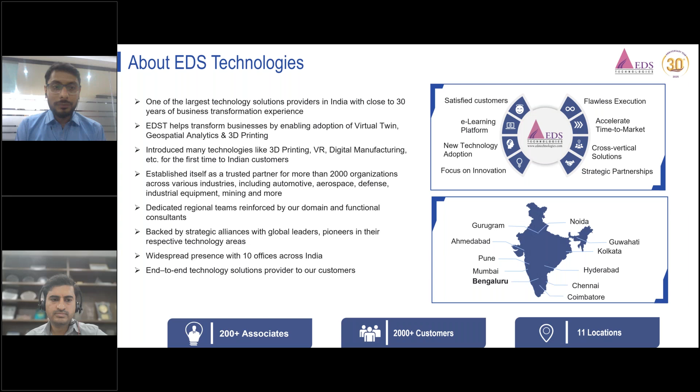We are backed by strategic alliances with global leaders like Dassault Systèmes, with whom we are a strategic business partner, and other leaders as well who are pioneers in their respective technology areas. We have a widespread presence with our offices across 11 locations in India. We consider ourselves to be an end-to-end technology solutions provider to our customers.

So today we have two speakers for our session today. The first speaker is Mr. Srikumar Maganti. He is the Senior General Manager Technical at EDS Technologies. He carries a rich experience of more than 23 years working in aerospace, automotive, energy, and the IE segments, involving design, simulation, digital manufacturing, and PLM applications. He has engaged and led multiple teams in technology pre-sales, technical support, corporate trainings, and customer relationship management. He has also worked on-site for various numerous prestigious clients to provide the best customer experience. At EDS Technologies, he handles the 3D Experience brand and also holds various global certifications from Dassault Systèmes.

Our second speaker for the day is Vinayak Chaudhary. Vinayak is currently serving as a Senior Application Engineer at EDS Technologies. He carries an overall of 11 years of experience in aerospace and industrial equipment segments, involving NC machine programming and validation and valves manufacturing. He also carries on-site global project delivery experience with commendable appreciations and best customer satisfaction. Currently, he is involved in digital manufacturing, technology sales, technical support, and corporate trainings.

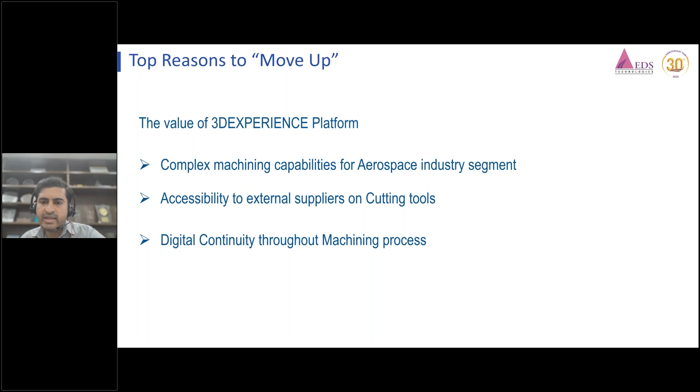Then the digital continuity through the machining process - how this platform will help maintain digital continuity into the machining process, we're going to understand that. And the last one, available on the cloud - this platform will be managed in the cloud, so how this cloud will help in the future, we'll look into that.

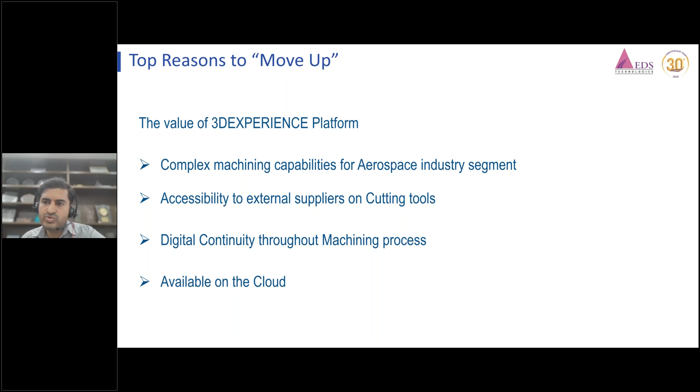So we'll understand here the 3D Experience platform, how it changes the way we do business. As I mentioned earlier, we will move from a file-based environment - CATIA is one of the file-based environments - to the 3D Experience platform. So how we can move and what benefit we can get from it.

The 3D Experience platform enables the capability to work anywhere, and opens the door to collaborating among multiple people in different locations. Even if it's just three people in the same town, now they can work in their own homes and offices. There's no need to come into the office, and they can work in different places too.

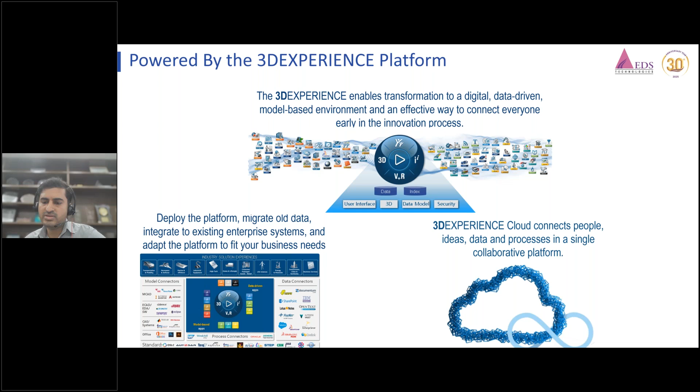You can utilize your existing V5 data and the post processor in the newer environment. The 3D Experience platform can be implemented using servers in your own company or on the cloud. We'll cover the advantages of using this platform a little later in this session.

So here in this video, we'll just see what the 3D Experience Delmia machining capabilities has - just briefly, we'll see a brief video here. Later, in the next slides, we'll go step by step through what capabilities we have there.

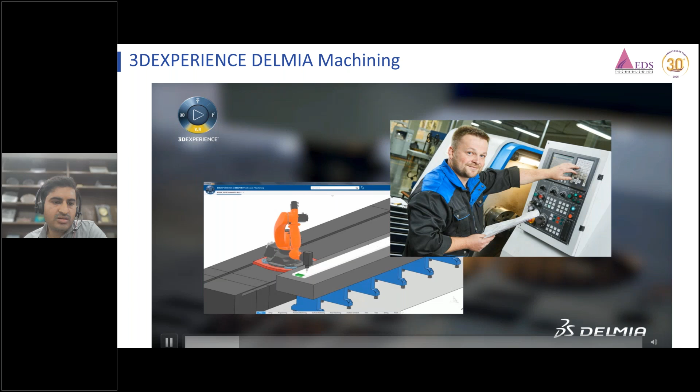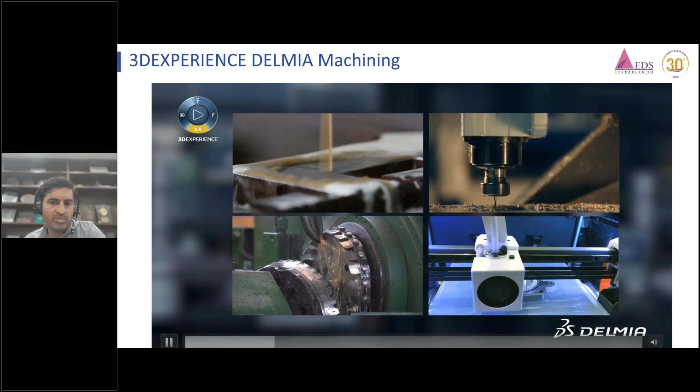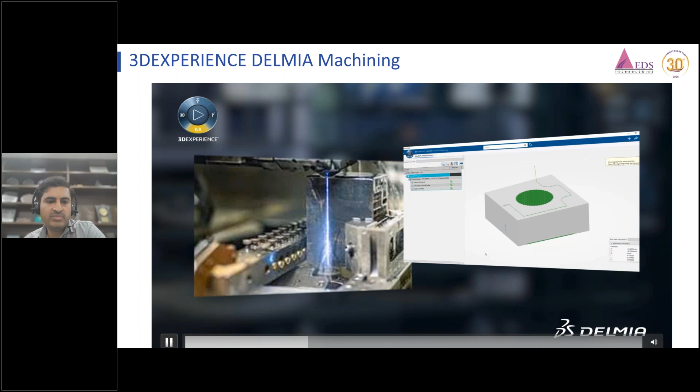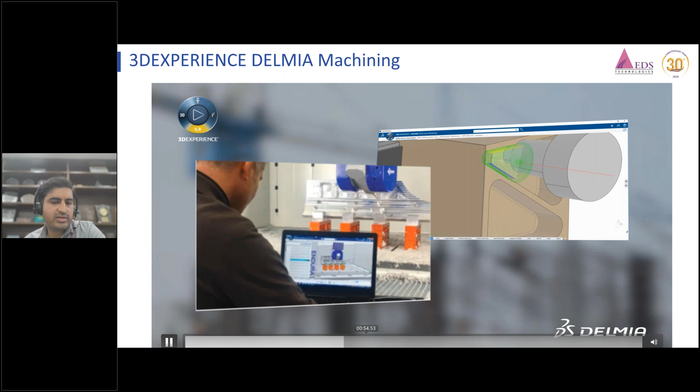And some new features have been added into this 3D Experience platform. In the coming slides, we're going to understand those applications in detail.

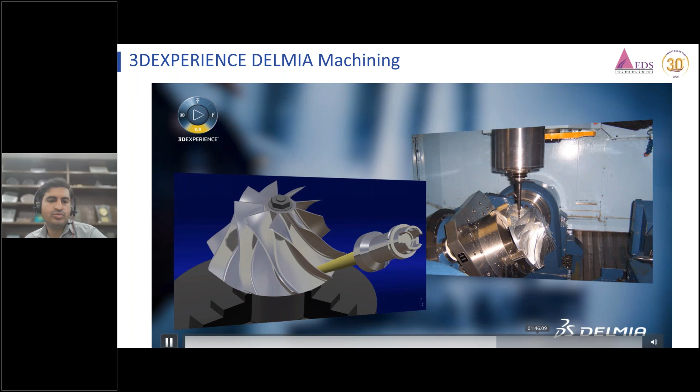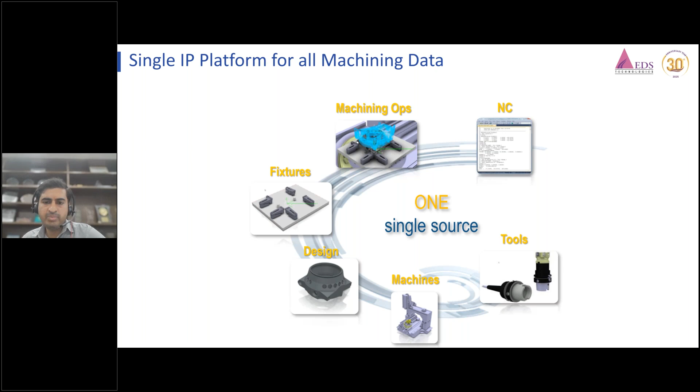So here in this platform, we can reuse all CAD machining processes, NC programs, machines, and accessory tools from one single source. Semantic search capabilities allow every NC-related object to be found quicker and easier. Version control can also be managed in this platform, along with design tooling and fixturing in the same collaborative environment. All those things can be managed in a single source platform.

So let us understand the cutting tool management in the 3DS platform, and how it will help the aerospace industries and other industries as well.

For example, there will be confusion for a new programmer creating a tool - whatever tool we're going to create, we don't get an idea whether that will be available in the market or not. So here we have an advantage: you can fetch the existing tool directly from the vendor's website. Whatever the vendors have in their websites and in their plant, we can directly pull those tools into our 3D Experience platform, so that data can be utilized internally by all stakeholders like NC programmers, tool rooms, and shop floors.

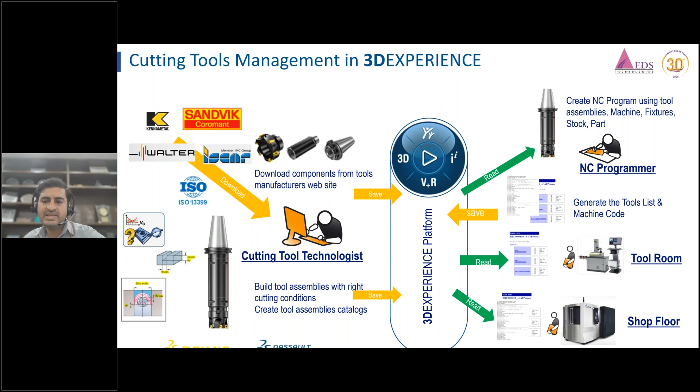All those stakeholders can utilize it from the single source. Let us see in the next slide how we can create that tool.

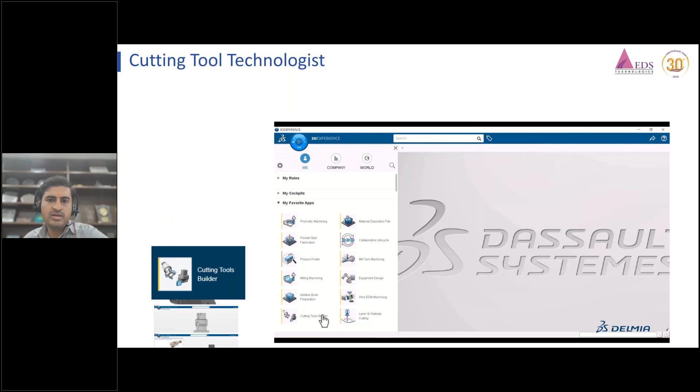So here in the video you can see that we have just added 3 vendors: Kennametal, Iscar, and Sandvik. I'll select one of them, the Iscar vendor website. From their website we have the capability to get the STP file, exactly what it looks like, into the P21 format, which we can directly download from the vendor's website and make into a tool assembly.

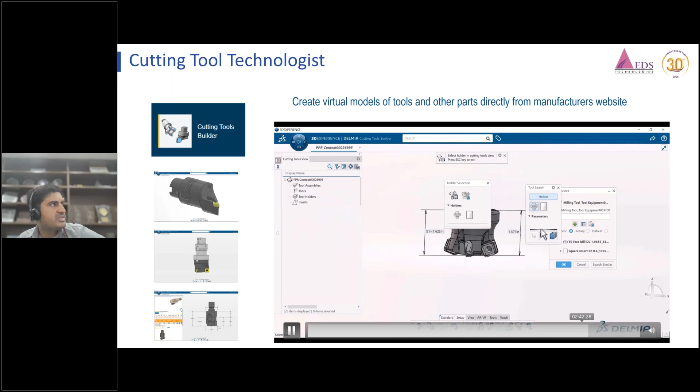Now for this tool, what are the suitable inserts, we are going to add that. You can see we will similarly add the inserts from the same website, and what suitable holders are available, that we can also pull into this platform. Now you can see exactly what dimensions the cutting tool provider has, which we can directly use in our machining platform.

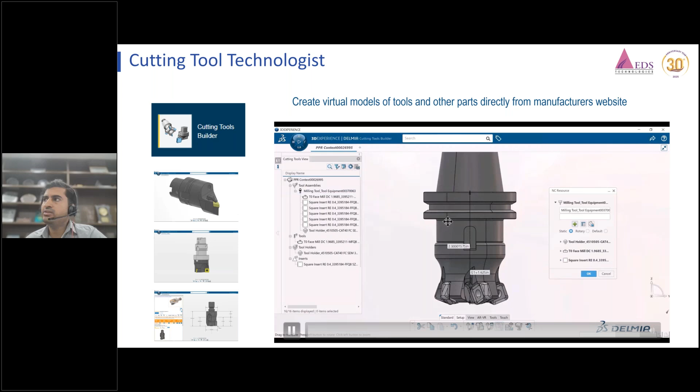So like this we can create n number of tools and make it as a catalog. Then wherever available, we can directly call from the catalog and reuse it. So it will save us ample time to create NC machining programs.

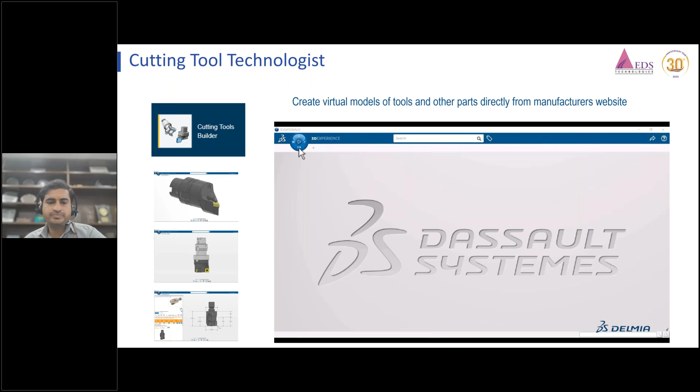So next we understand improved collaboration across departments. How does collaboration help us improve production? An improvement in overall machining program time plays a major role in increasing quality and teamwork. How does that happen? Let's check.

So in this 3D platform, what happens is they can work directly on the CAD data model managed by the CAD team. If the CAD team needs to create a new version, they are free to work with the previous version and update to the newest when they want. So that work can happen at the earliest design step, and they can optimize their program to reduce programming time and ensure quality. This is just one example of how you can break organizational barriers, expand technical knowledge across disciplines, and collaborate.

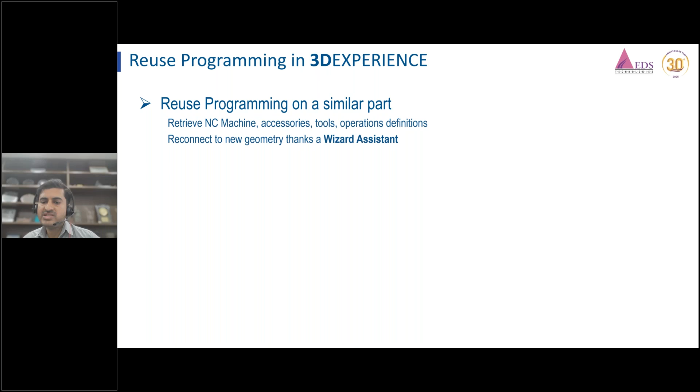Let's look at some examples. Next we'll see reusing the program, and how reusing programs benefits us. You can see here capitalizing on machining knowledge, know-how, and replaying operations on a similar part and features, so we can drastically gain time when left and right parts have to be programmed.

With this option we can save ample time. For example, if for the same kind of part we took 50 minutes, we can reduce that by 50% to 40%. If a slightly modified part comes in, using this option we can reduce that time and save up to 50% to 40% of the programming time.

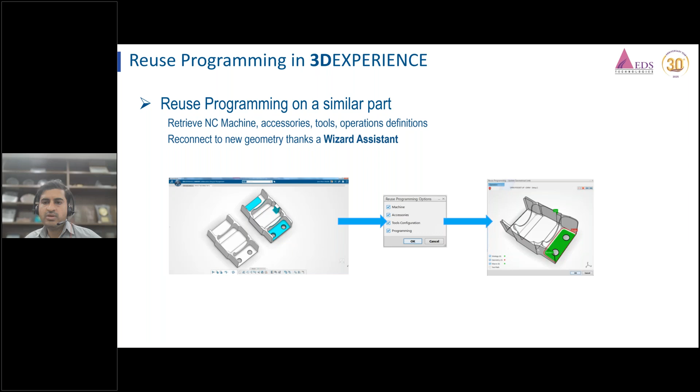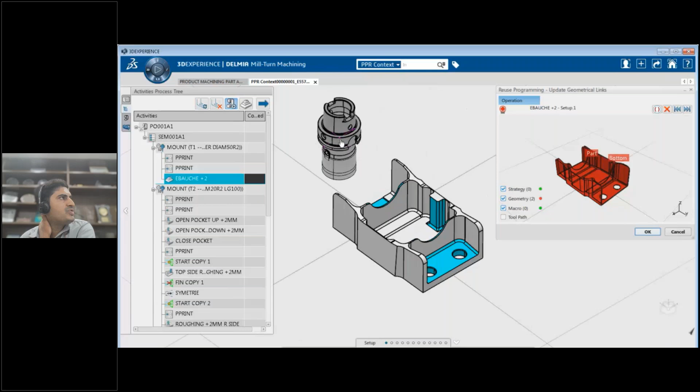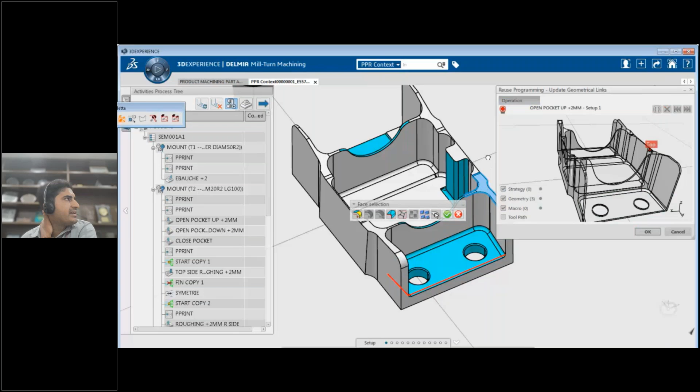So here in one of the videos you can see we have imported a slightly modified part. Since a similar part was used earlier, just by selecting the next option you can see what type of tools we used and what geometrical parameters we selected. Those geometrical parameters can directly be reselected from there to here, just by selecting options like part and bottom, as shown in the video. By selecting that, you create this option and you're ready, having directly reused that particular machining operation just by selecting these options.

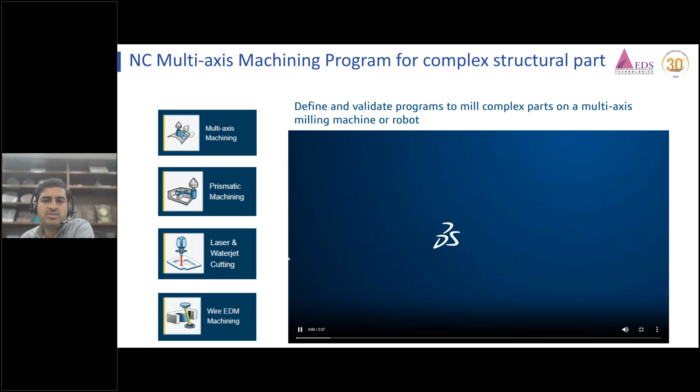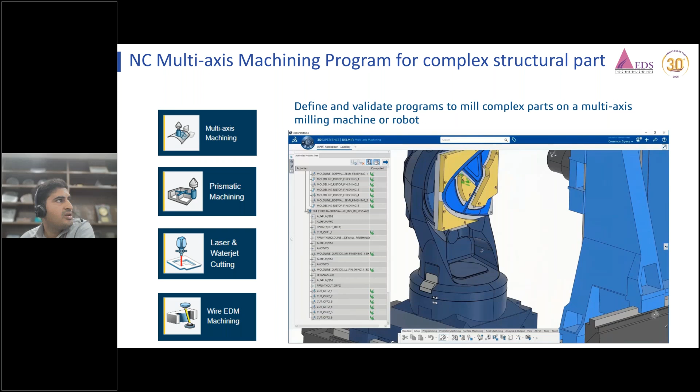Next we'll understand NC multi-axis machining. This is one of the most used techniques in the aerospace industry, also called flank contouring. This helps aerospace industries machine complex parts like structural parts with inclined surfaces and flanges. It helps very smoothly finish these operations and get the exact required surface. We have much more flexibility here, like tilting angles and all, such as tangent fan, fixed angles, and fourth axis machining.

Many of the options we have here based on the operations, we can choose those options and utilize them to improve our machining quality.

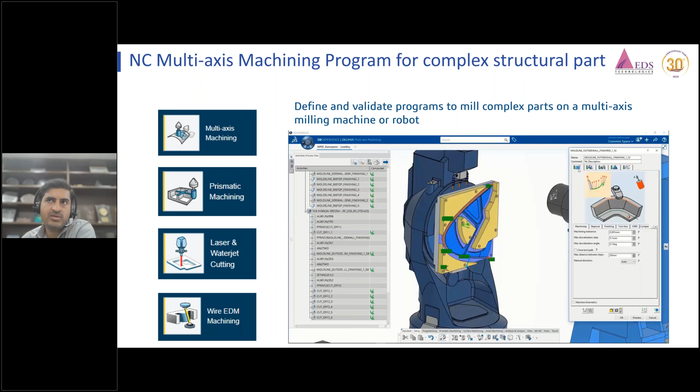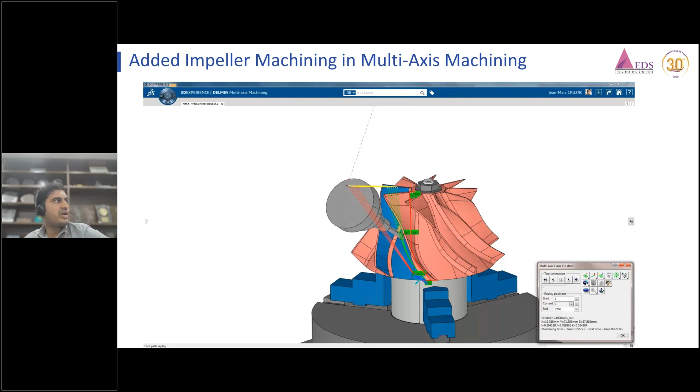Next, there's an option we added into this 3D Experience platform called impeller machining. This is also a multi-axis machining program. With this, we can directly create a machining program.

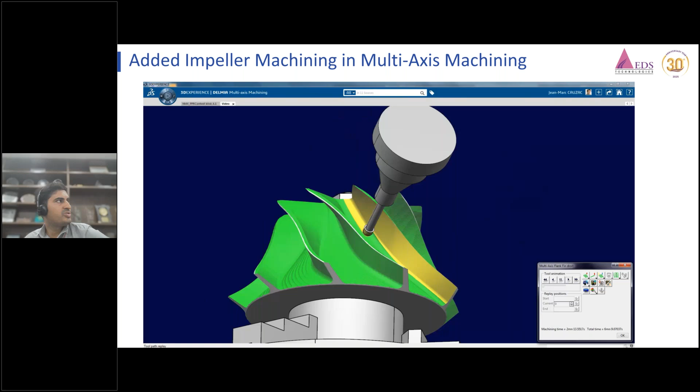We have a separate machining operation called impeller machining. With that only, we have the feasibility to select the different set of flanges and what are the impeller blades. Those we can machine clearly and very easily create the machining program for, and we can validate it into this platform.

Next option is they have added helix motion to the surface machining option. This added feature will help when changing the cutting tool or changing the radial path, there will be a getting a line. In actual machine it's a visible line we can feel. So to avoid that kind of issue, they have added one option called helix 3D.

With this option, continuous smooth motion will be generated. There is no radial tool change in between. So with this operation, we can avoid the unnecessary lines created onto the surface of the machined part.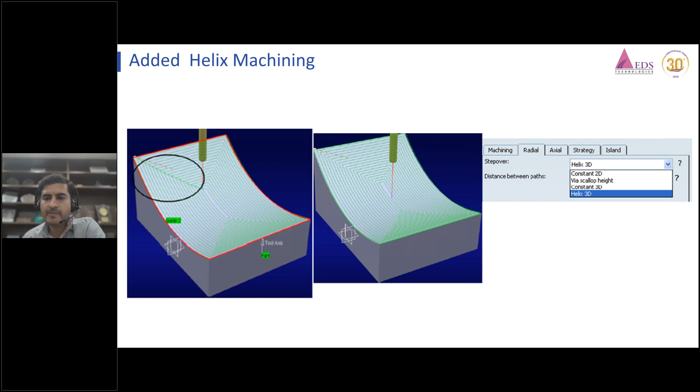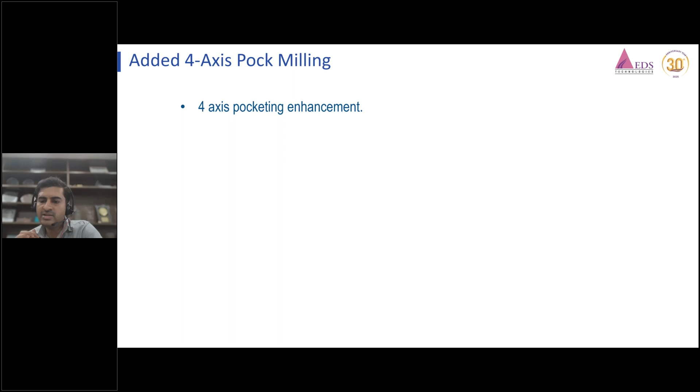We can select that, and it allows the definition of the lead angle of the fourth axis lead angle onto the tool axis. We can perform that here.

And the added stiffener option. In V5 we used to use multiple operations. For example, when I was in the aerospace industry, I would use multiple isoparametric operations to create this stiffener operation, which would take ample time to create those n number of machining operations. So here they have added this stiffener operation.

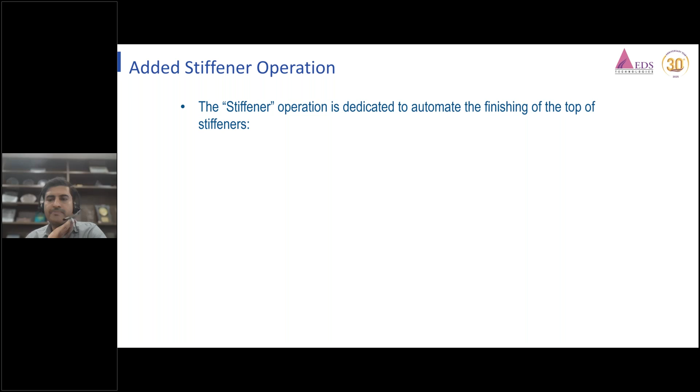So just by selecting this one option, we can finish all the tapered surfaces on the edges of the part. We can finish it with a single operation by selecting wherever we want to machine the surfaces. We can achieve this, and again it will save us ample time.

Another advantage added in the simulation options is the transparency option. It helps display only the material that exists in the missing areas, if we miss any hole or drill precision holes, or have any leftover materials.

With this transparency option, we can see through it and analyze the leftover material, and later remove that material with the help of this option. So it again improves our quality checking for each machined part program.

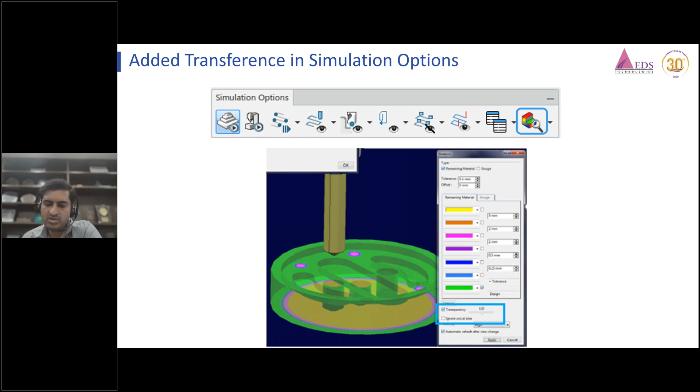The next feature added into this 3D Experience platform, the Delmia machining platform, is that we can edit the n number of tools we used to create NC programs. There we can directly edit the cutting parameters. We have the same feature in CATIA also.

But here, we can extract that into CSV format as well, which helps us validate faster. Whatever cutting tools and parameters we have used, we can directly extract into CSV format and do the QC there also.

And the infrastructure for manufacturing data from CATIA V5 import, if we are CATIA users, we can pull the old data files into our new platform here, so that we can directly access the machine tools into the 3D Experience PPR, and simulate the toolpath and recreate what we had created in V5 machining, CATIA machining.

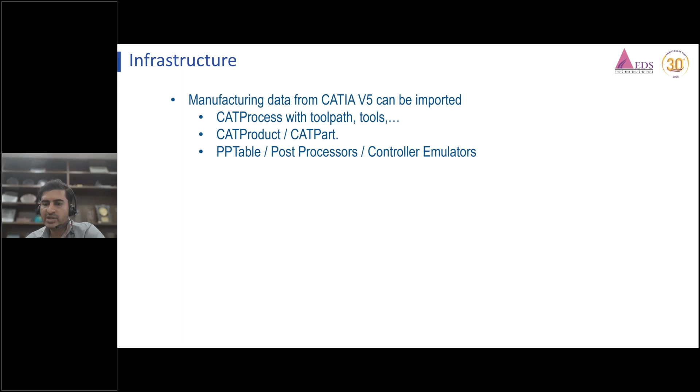Importing V5 5-axis machining, for example in DMC 75V linear, from the 3D XML format, associating to the part operation, this machine setup mount, and import resources and replace the machines. All these activities can be performed into this platform.

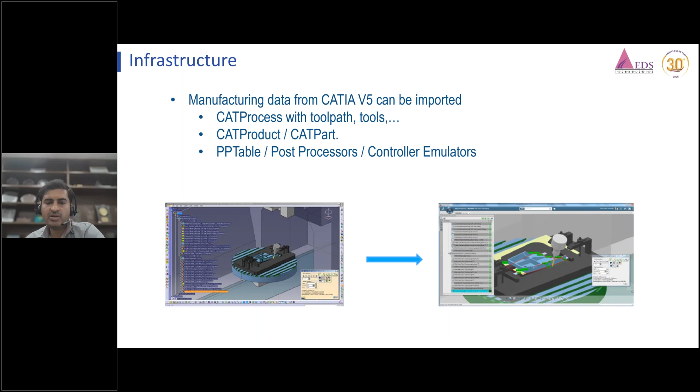For example, we will look into one of the videos here. You can see how we can import the old V5 data here. You can see the process file we are importing here, opening into the new 3D Experience platform.

So here, file to process, how many files need to be processed to convert this 3D XML file here. Okay, so now it's just converting. The importation is now importing into this format. Okay.

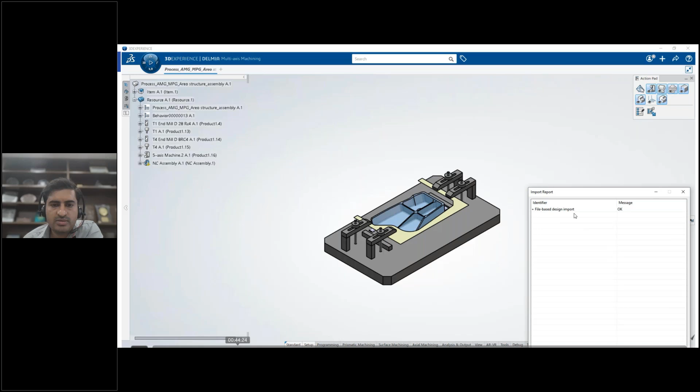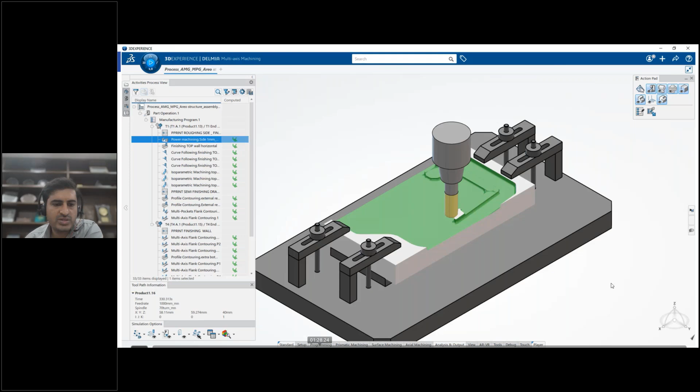Now you can see what fixtures we have used, those we have imported, and we are going to simulate with the machines. First we will just simulate with the rough stock. What rough stock have we used here?

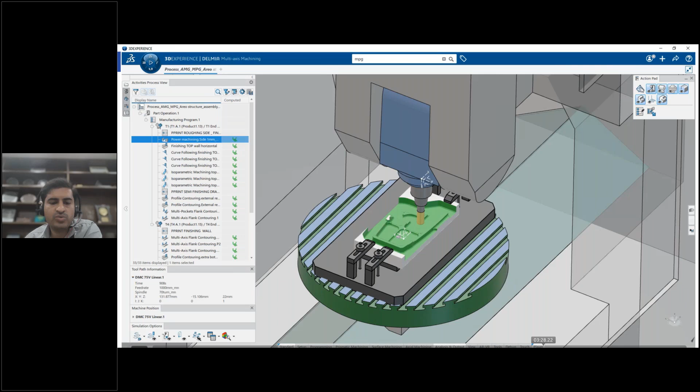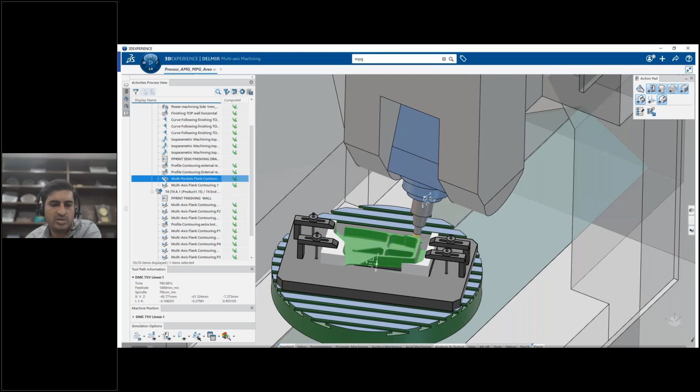So next we are going to simulate with the machine. So whatever old data we have, we can import into this platform, and we can use this machine with its machine kinematics. There is no other third party machine kinematics needed. Inbuilt, we can create our own machine kinematics into this platform, call it into the platform, and validate with the machine kinematics.

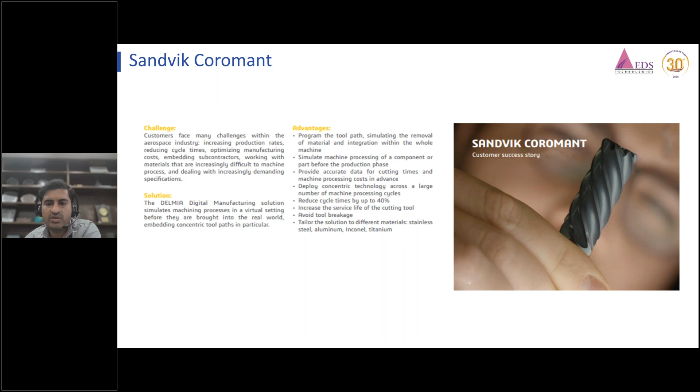So here, one of the customers we call Sandvik, they already got benefits from our 3D Experience platform. They are one of the users. So let us look into a small video of how they have got benefit from this platform.

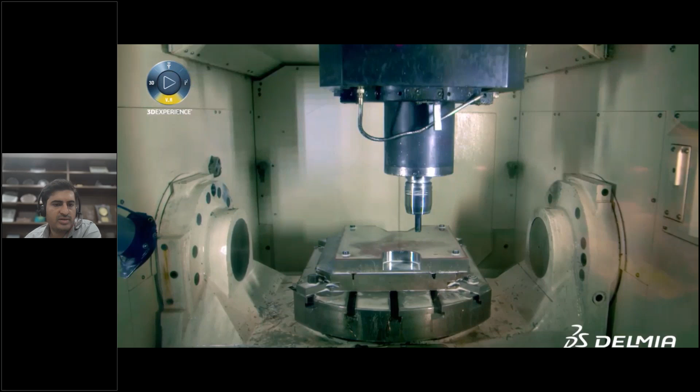They perform machining operations with different suppliers, different OEMs, on hard material like Inconel also, and they have to prove out their tools with good efficiency. So they have chosen this platform. They were also a CATIA user previously, and they have chosen this platform to improve their efficiency.

And gain customer trust in their products, they have chosen this platform and improved their quality, and improved their tool life by around, they have doubled their tool life, and presently they are one of the customers who have utilized this software.

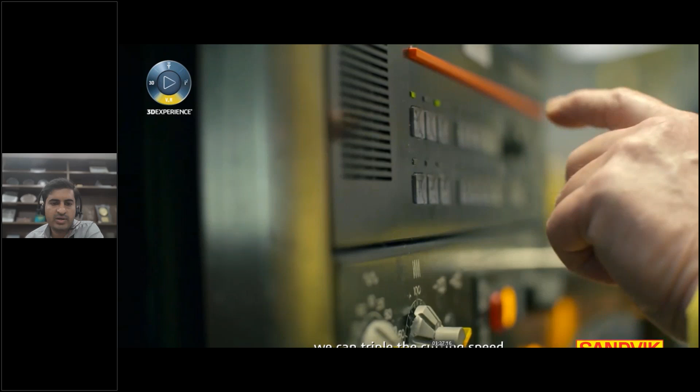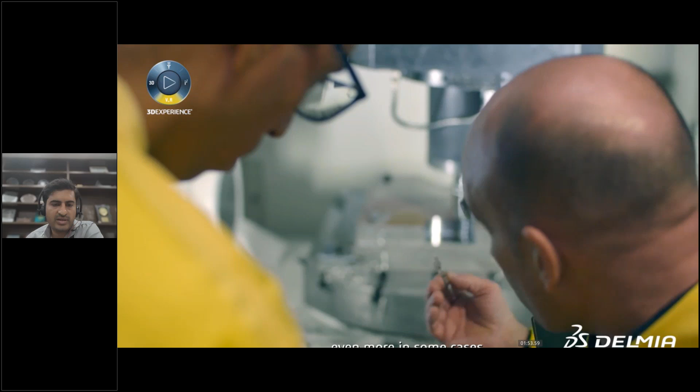By utilizing this software, they have reduced the cutting cycle time up to 40%, and increased their cutting speed on particular parts, with a particular tool and material, and doubled the tool life, and they have been able to create a quality product with this platform. Okay.

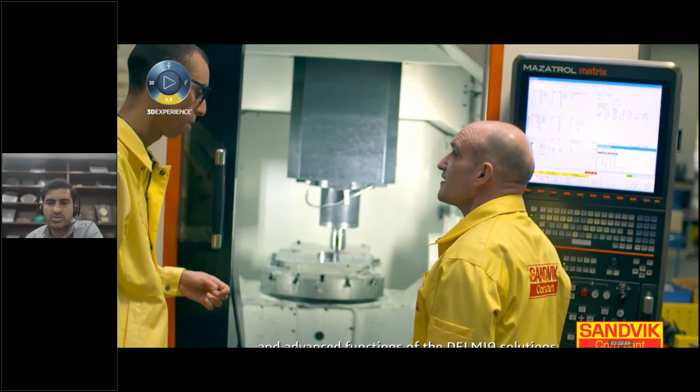So in summary, we will understand what we have discussed today. Okay, so we talked about the value of the 3D Experience platform, what exactly the 3D Experience can do, then the complex machining capabilities for aerospace industry segments, what complex capabilities they have newly added into this platform, and how we can utilize that for our better future.

Next, the accessibility to external suppliers on cutting tools. We looked at how we can directly create tools. There is no need to create our own tools again. We have an option to create our own tool, but we can also directly pull from the vendor's website. So it will save our time in creating numerous tools, right?

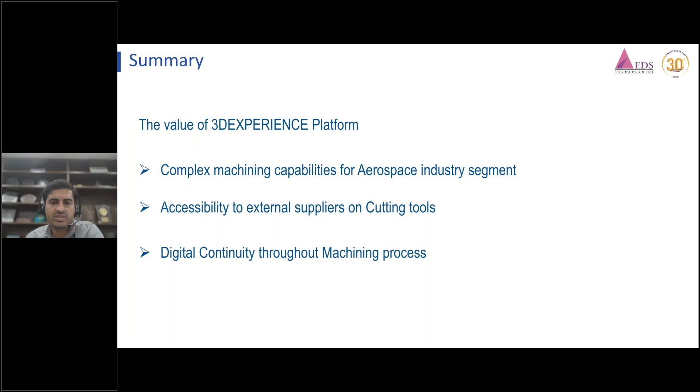Then finally, the digital continuity - how all stakeholders collaboratively work together and share knowledge internally, and how they can save time internally. So we have gone through all these capabilities, all available on the cloud, and how they can utilize this cloud platform. So we came to understand all these points in today's session.

So these are the overall capabilities of the 3D Experience platform. I think those who are presently using CATIA machining, this will be a better opportunity to take a chance and grow with new software and new opportunities.